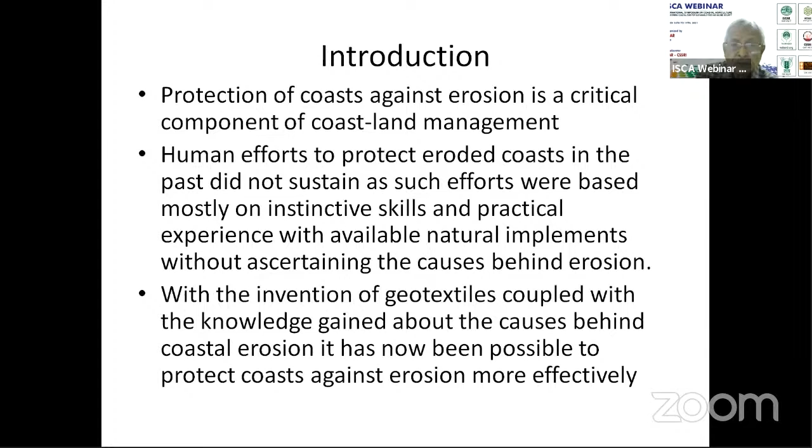The main causes behind coastal erosion are waves driven by wind and storm surges resulting out of tectonic disturbances such as tsunami, and waves caused by big ships veering past the coast. Offshore structures close to shore also cause reorientation of current and wave direction towards coast. Disposition of oceanic currents directed coastward and their celerity, plus littoral - that means along shore - and tidal fluctuation. In fact, oceanic environment is highly dynamic, demanding flexibility in design of coastal protective measures.

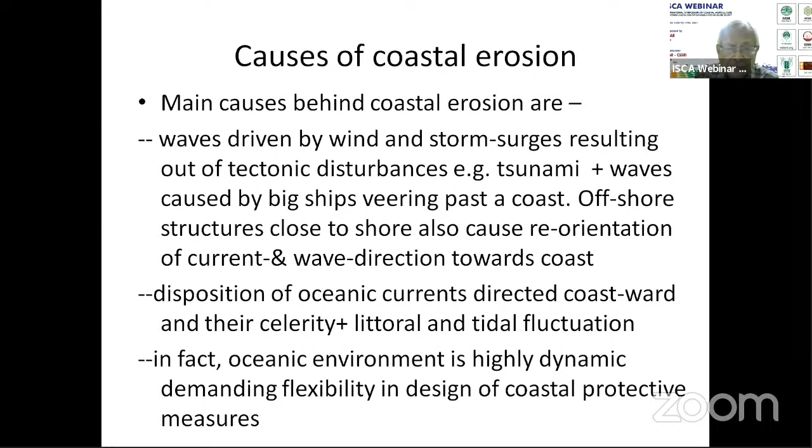Let me explain what is geotextile. Geotextiles are basically breathable planar fabrics made of either man-made fibers or natural fibers such as jute or coir. I will confine my presentation to man-made geotextiles made of thermoplastics such as polyamides, polyester, polyethylene, in view of the fact that natural geotextiles get biodegraded in exposed saline ambience quicker than the desired performance life which the design demands. The other aspect regarding natural geotextile is about porometry, or apparent opening size of the fabric, which coarse natural fibers cannot achieve as precisely as their synthetic counterparts. In fact, porometry is a critical criterion for effective filtration function of any geotextile.

It may be mentioned that geotextiles for coastal protection are used not as fabric only. Various innovative forms of geotextiles have since been developed and produced according to severity of erosion. Usually, geotextiles are applied in or on soil to improve its engineering performance. Engineering performance implies developing adequate capacity of soil to remain stable under impact of different kinds and degrees of imposed forces. Geotextiles basically act as change agents that help build up effective stress.

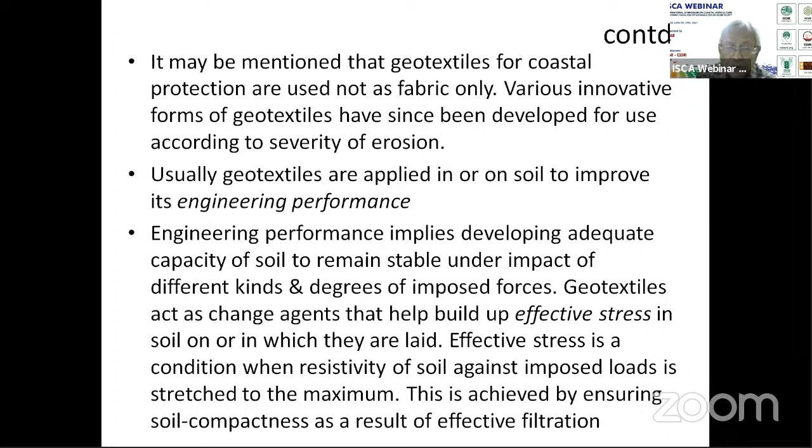Engineering performance implies developing adequate capacity of soil to remain stable under impact of different kinds and degrees of imposed forces. Geotextiles act as change agents that help build up effective stress in soil, on or in which they are laid. Effective stress is a condition when resistivity of soil against imposed loads is stretched to the maximum. This is achieved by ensuring soil compactness as a result of effective filtration.

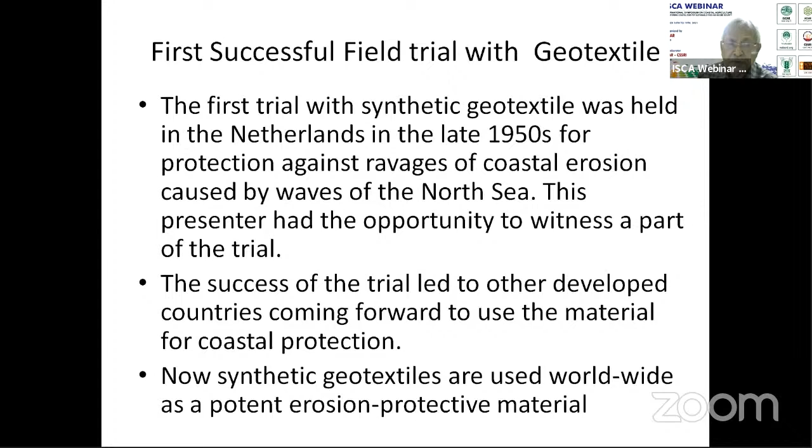The first trial with synthetic geotextiles was held in the Netherlands in the late 1950s for protection against ravages of coastal erosion caused by waves of the North Sea. This presenter himself had the opportunity to witness a part of this trial. The success of the trial led to other developed countries coming forward to use the material for coastal protection. Now, synthetic geotextiles are used worldwide as a potent erosion protective material.

The special features of synthetic geotextiles are long durability, high tensile strength, and adaptability to manufacture customized fabrics in bulk at affordable costs. The main functions of any geotextile are separation, filtration, and reinforcement. Natural geotextiles lag behind their synthetic counterpart in all the above features. The severity of erosive forces in coasts demands uncompromising compliance of these features.

In fact, there are three factors. First factor is durability. Second factor is tensile strength. Third factor is fiber fineness, which will make it possible for any geotextile to conform to the desired apparent opening size.

But in respect of some natural geotextiles, I personally worked in the field of jute geotextiles. I know there are some limitations of natural geotextiles, which is why I'm speaking about synthetic geotextiles, in view of the fact that the erosive forces on the coast, sea coast, are very severe, and we cannot make any compromise in the design of a geotextile.

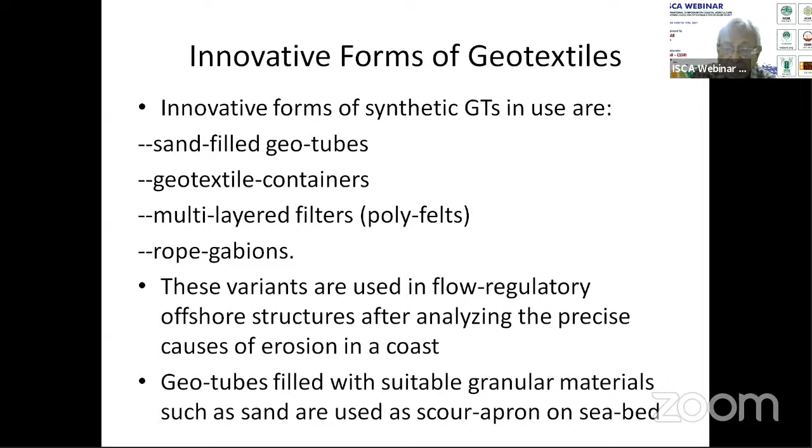After analyzing the precise causes of erosion in the coast, geotubes filled with suitable granular materials such as sand are used as scour apron on the seabed. Geotubes are also used as a component of groins or spurs or dikes. These are offshore structures. Large volume geocontainers are sometimes used as components of offshore structures also.

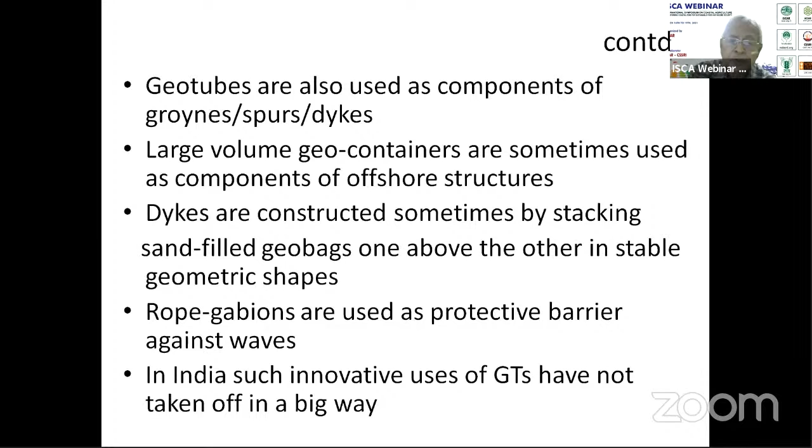Dikes or embankments are constructed sometimes by stacking sand-filled geobags one above the other in stable geometric shapes. Rope gabions are used as protective barriers against waves. In India, such innovative uses of geotextiles have not taken off in a big way.

There are two principal types of geotextile that are used conventionally: woven and non-woven. This is known to all geotechnical people. Woven geotextiles are used for separation, filtration, and reinforcement, while non-woven geotextiles supplement or improve filtration function.

Woven geotextiles possess higher abrasive, puncture, and tearing resistance and tensile strength than their non-woven counterpart. Non-woven geotextiles score over woven types in respect of permeability. In coastal erosion, sometimes both types are used in conjunction in cases where strength and filtration are both called for.

For a geotextile to perform effectively, it needs to satisfy mechanical, hydraulic, and durability criteria at sites. The long-term behavior of a geotextile against mechanical stresses in a site-specific hydraulic environment is pre-estimated in a laboratory. When the fabric is overlain by stone concrete revetment to withstand the initial impact of erosive forces, including uplift caused by seepage flow...

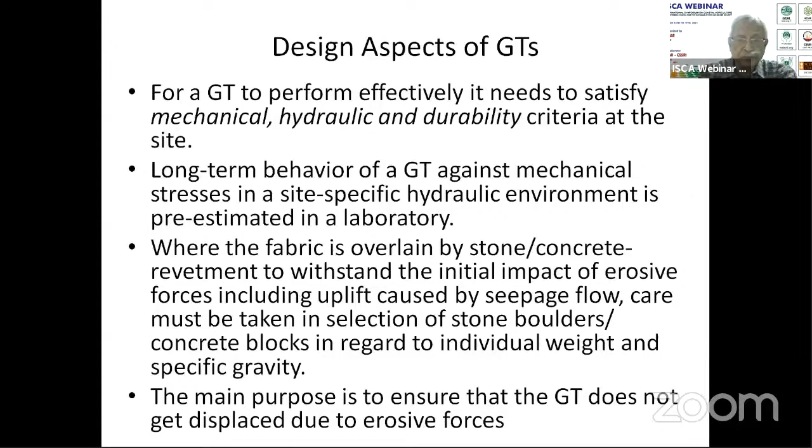Care must be taken in selection of stone boulders and concrete blocks in regard to their individual weight and specific gravity. The main purpose is to ensure that the geotextile doesn't get displaced due to erosive forces. In extremely severe cases, additional structural interventions such as groins, breakwaters, spurs may be needed to ensure repulsion or reorientation of currents and drifts away from the coast.

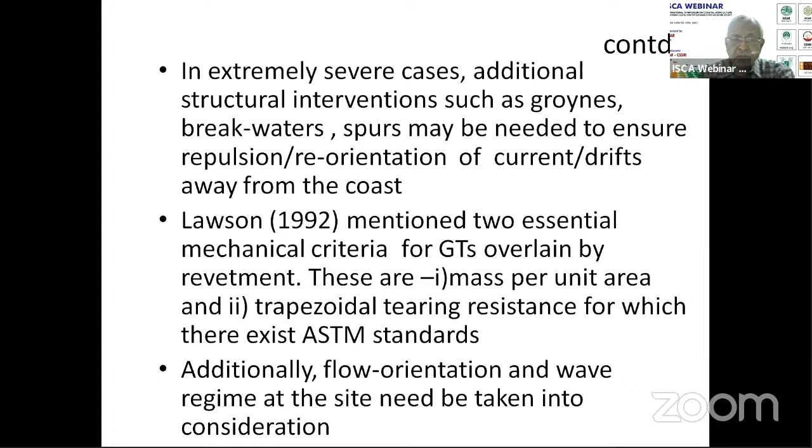Lawson, in a paper in 1992, mentioned two essential mechanical criteria. These are mass per unit area, and number two, trapezoidal tearing resistance, for which there exist ASTM standards. Additionally, flow orientation and wave regime at the site need to be taken into consideration.

The type and nature of coastal soil also requires to be looked into. The nature of coastal soil material will determine the desired along-plane and across-plane drainage capacity of the geotextiles to be selected, which is called transmissivity and permittivity in geotechnical parlance, through prior laboratory tests.

In fact, selection of the right product of geotextile and control of material quality and execution are critical. For coastal protection, it is advisable to adopt a conservative design. There are two aspects: clogging and blocking. The geotextile may get clogged.

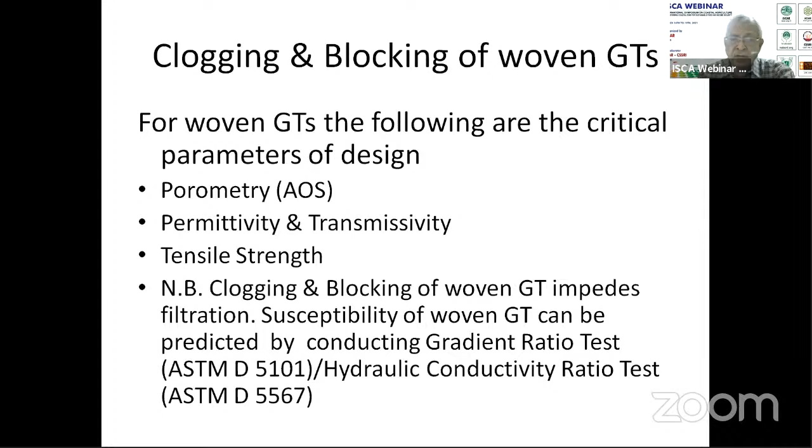Inside the geotextile, there may be deposition of sand or other particles, and blocking is superficial coverage or blockade of the geotextiles. For woven geotextiles, porometry or apparent opening size, permittivity, transmissivity and tensile strength are important. Clogging and blocking susceptibility may be determined prior to application by conducting the gradient ratio test (ASTM D5101) or the hydraulic conductivity ratio test (ASTM D5567).

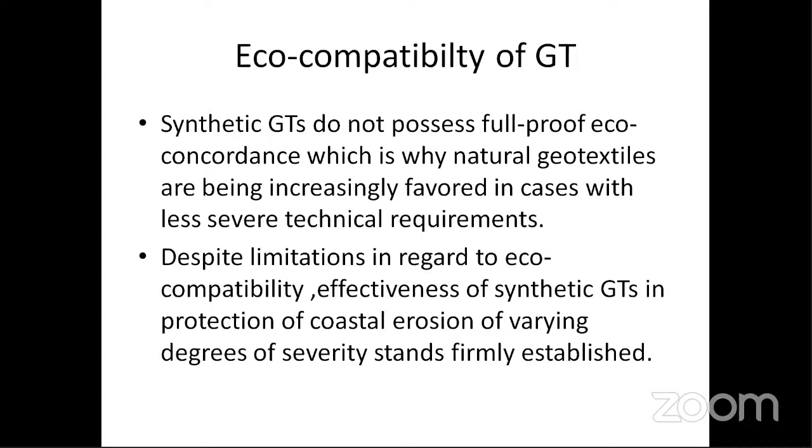Synthetic geotextiles do not possess foolproof eco-compatibility. That is a major disadvantage, which is why natural geotextiles are increasingly favored in cases of less severe technical requirements. Despite limitations in eco-compatibility, the effectiveness of synthetic geotextiles in protecting against coastal erosion of varying degrees of severity firmly stands established.

My suggestion is that we must explore if mangroves on the coast can be nurtured concurrently with synthetic geotextiles to protect coastland against erosion. Mangroves with stilt roots can hold the coastal soil and at the same time induce accretion of silt over the coast when silt-laden seawater passes through their root system, besides attenuating wave impact. There are about 64 varieties of mangroves with varying degrees of salt tolerance and growth rates. It is advisable to consult experts to decide on the right mangrove species for a particular site, depending on salinity and soil type. Perforations may be made in the geotextile to plant mangroves in them.

This is just a suggestion and demands in-situ trial. In fact, when I was in Port Trust, I was instrumental in setting up a mangrove interpretation center in Nayachar Island, opposite Haldia Docks. But the full research could not be completed before I was transferred.

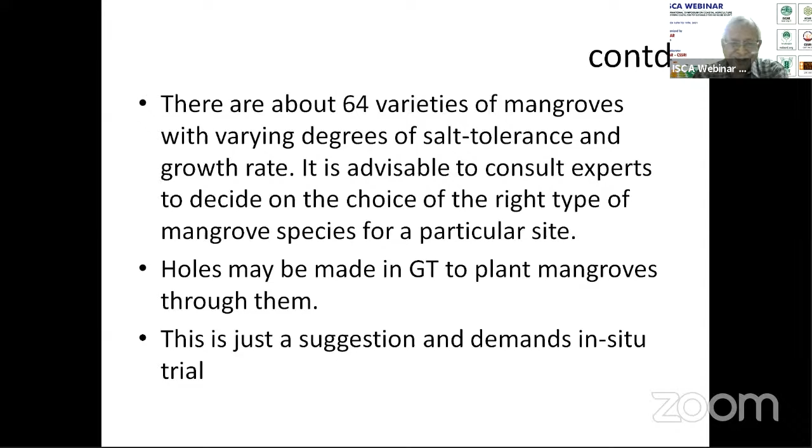Thanks for your attention. This is all what I want to say.

But I must say that the natural geotextiles, as Dr. Gautam Bose mentioned in his subject, that is a structured geotextile with composites of synthetic and natural blend. Whether this can be effective for coastal erosion of moderate severity can also be looked into seriously. I worked with jute geotextiles, and I am very much supportive of jute, but for coastal erosion, I'm apprehensive.

So that's my concluding remarks. I thank you all, Mr. Chairman, especially for conducting this seminar. Thank you very much.

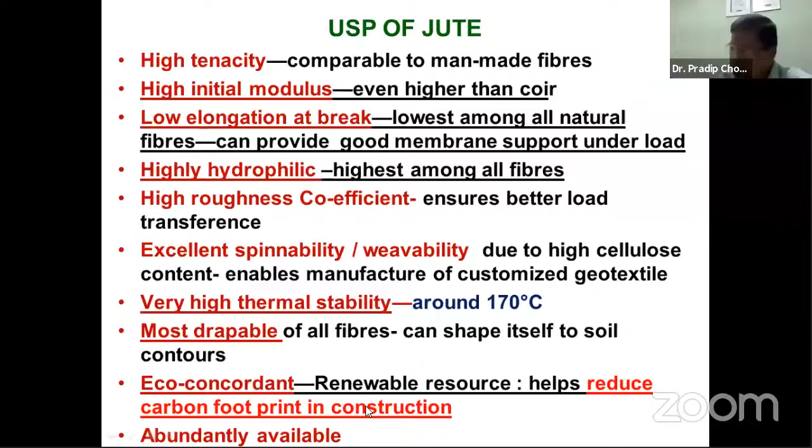There's a very strong high tenacity, high initial modulus. This is a very, very important factor, at low elongation at break. There is a hydrophilic property, a unique hydrophilic property - it can absorb 5 times dry weight in moisture. And also eco-concordance, renewable resource, helps reduce carbon footprint in construction work, and also the advantage is it's abundantly available.

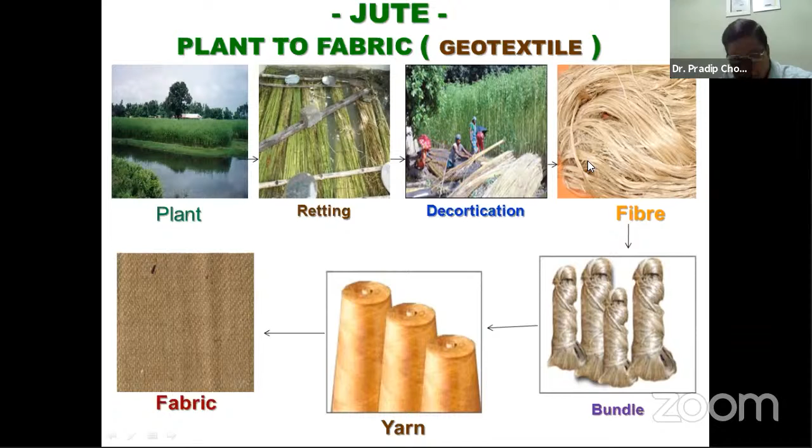My dear friends who have not seen the jute plant and the process, have a look here. This jute plant is retted, fiber is extracted. Thereafter, through mechanical processes, this type of fabric is manufactured using existing machinery in the jute industry. There are several types of jute geotextile - woven, non-woven, open structure fabric, and jute sapling bag - which have been developed and applied successfully all over the world.

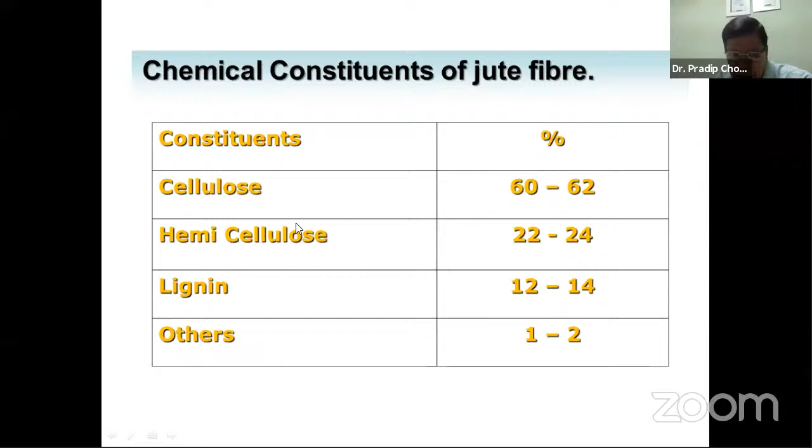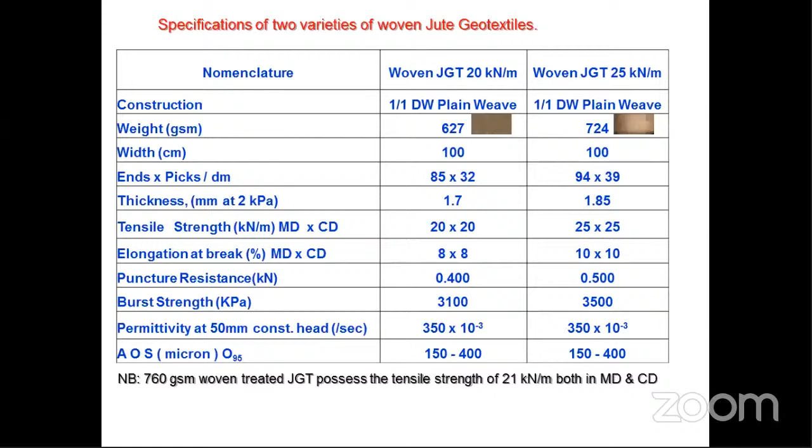These are the technical specifications of different types of jute geotextile. This is for riverbank erosion control as filter fabric - a 724 GSM fabric that has been developed by us, with tensile strength of 25 kilonewton in both machine direction and cross direction. Whereas in riverbank protection as filter fabric, it is 20 kilonewton, having a porometric range between 150 to 400, which matches with most of the particle sizes of soil. The 760 GSM woven jute geotextile, also developed by us, has 21 kilonewton tensile strength and has been used successfully all over the country.

And thereafter, the open structure fabric, open weave as it is called. These are the three main varieties of JGT developed by us and standardized, and included in the schedule of rates of RDSO, BRO, and also the Indian Railways. This fabric is the jute sapling bag fabric - BIS standard has been established, the IS standard is there. It is 272 GSM having these technical features.

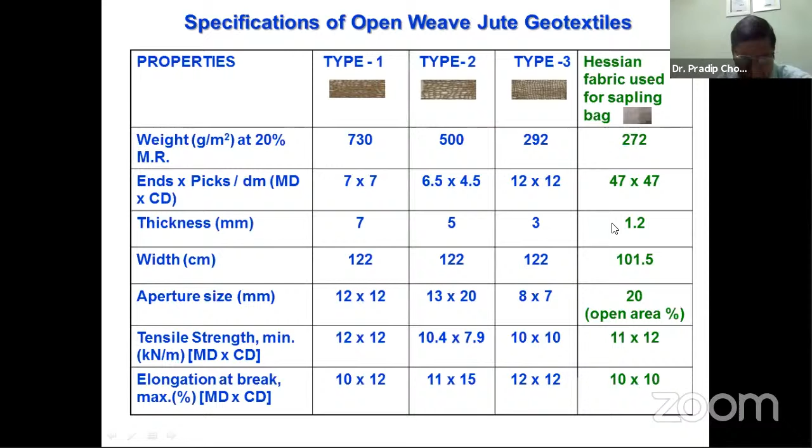Now all of you listening or seeing these slides will be very happy to note that jute geotextile products have been standardized by BIS - all 5 standards have already been standardized by BIS. Research, Design and Standards Organisation of Indian Railways has also prepared this guideline. A Unified Standard Schedule of Rates has also been published by Indian Railways in 2011, which helps all 17 divisions of Indian Railways, excepting Metro Railways, who are using jute geotextile on a huge, large scale.

Indian Road Congress, the most powerful body, which road engineers follow as guideline - after standardization and publication of all these standards, there is now a standard guideline for the design and construction of low volume rural roads using jute geotextile, IRC SP 126 2019. That is the latest achievement. We worked hard and the success came that IRC has accepted and published the IRC code, which you may call the Bible of road engineers for using jute geotextile in construction of rural roads.

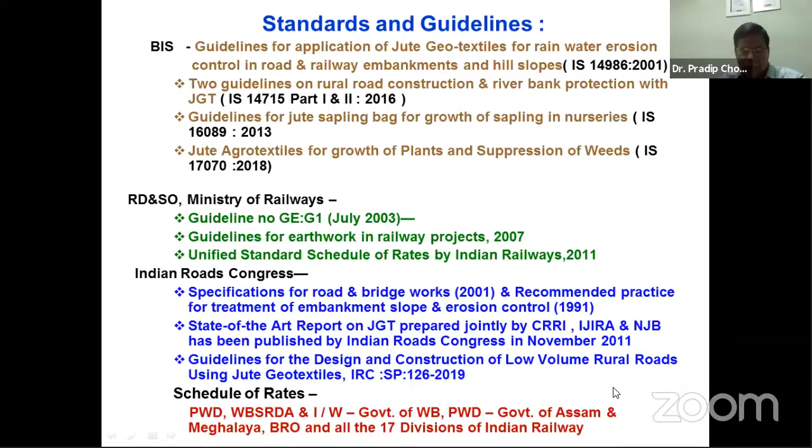And schedule of rates - PWD, WBSRDA, irrigation, PWD of Assam and Meghalaya, BRO, and all other 17 divisions of Indian Railways - they have included and we have standardized it in their schedule of rates.

Jute geotextile is a biodegradable material, known to all including the speaker, that after some point of time it will degrade and mix with the soil. But why are we working with jute geotextile?

Sanmal Sahab has rightly said that jute cannot go everywhere, but in many cases jute geotextile is very effective. Findings of renowned engineer scientists worldwide show that percentage elongation at break of JGT is significantly lower than synthetic geotextile, which is more than 50%, whereas in jute it is around 15% maximum.

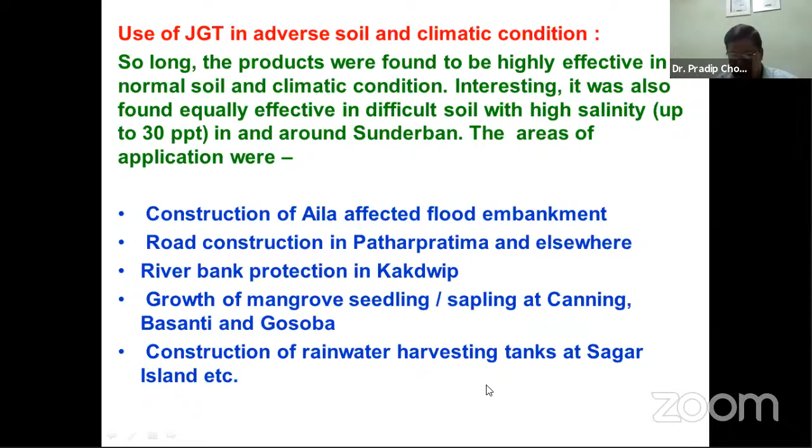Now I would like to show you some case studies. How should I believe? Saying good words is not enough - show the results, then one can believe it. The reconstruction of the Aila-affected flood embankment is one such case.

Name of the work: reconstruction of about 980 kilometers of flood embankment in Sundarban and adjoining areas in North and South 24 Parganas of West Bengal, damaged by severe cyclone Aila in 2009, under the Sundarban Embankment Reconstruction Project by the Irrigation and Waterways Department, Government of West Bengal.

Total 98 sites at Jaynagar, Kakdwip, Gosaba, Basanti, Sonakhali, etc., of South and North 24 Parganas district. The objective was reconstruction of 6-meter high earthen embankment with the use of 500 GSM open weave jute geotextile, followed by grass turfing for stabilization of the slopes of the earthen embankment, to protect the land, houses, population, etc., and to arrest inflow of saline water to the mainland of the area.

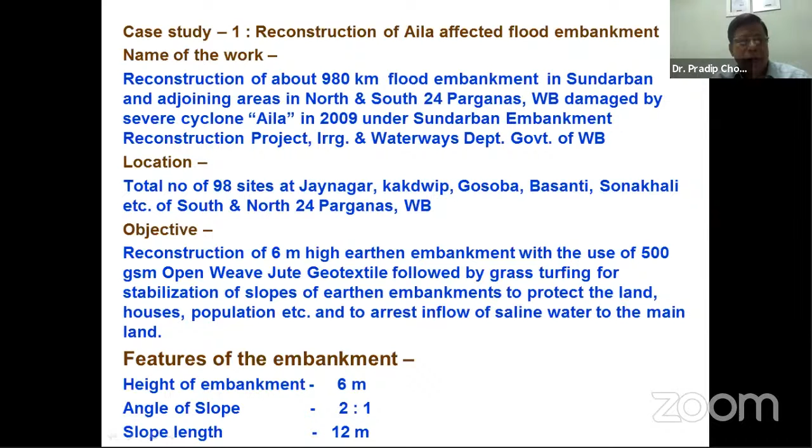Features of the embankment: height was 6 meters, angle of slope was very gentle at 2:1 depending on the angle of internal friction, and slope length was an inclined length of about 12 meters.

This is the simple method of laying jute geotextile on the prepared slope. It is available in the form of roll or bale, whatever it may be. It is rolled down the slope and anchored onto the ground with the help of nails and other means.

The surface of the slope was first dressed and leveled. JGT was laid side by side on the surface with an overlap of 10 centimeters and fixed onto the ground with bamboo pegs or iron nails, whatever was available. Top and bottom ends were anchored in trenches dug at the top and bottom lines so it would not be dislodged due to rain, and grass sods and seeds were spread, followed by occasional watering.

Result and discussion.

At the end of 6 months of application of jute geotextile, the slopes of the embankment were found to be sufficiently stable and the entire surface was covered with vegetation. A similar process was adopted to restore the entire flood embankment in phases.

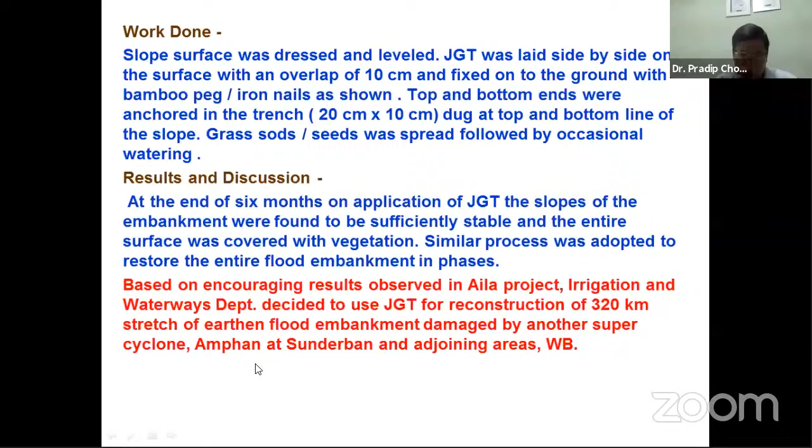Based on the encouraging results in the Aila project, the Irrigation and Waterways Department decided to use jute geotextile for reconstruction of a 320-kilometer stretch of flood embankment damaged by another super cyclone, Amphan, at Sundarban and adjoining areas. They will take our support and do that.

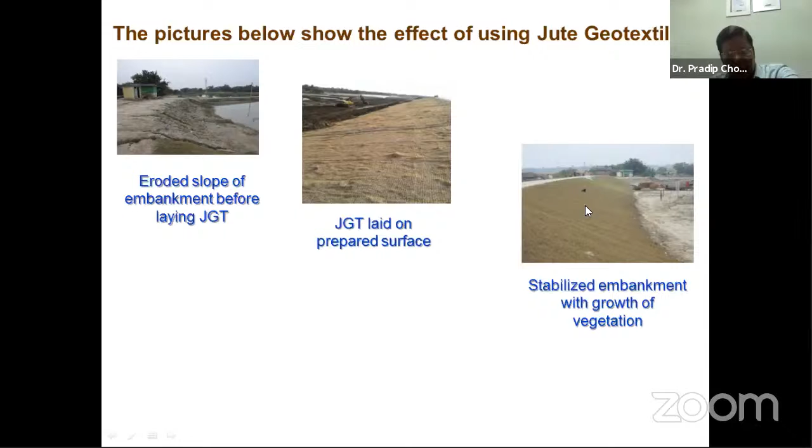This is a pictorial view of the Aila embankment. The eroded slope is vulnerable to erosion. Jute geotextile was laid on the ground, on the slope, and anchored properly. After 3, 4, 5 months, the entire area was covered with vegetation. That is the most interesting thing.

Granular subbase layer 1 and 2, 100 millimeter each, was applied, also laid prior to applying the water-bound macadam layer. As of day before yesterday, this layer was done, and within 1 week it will be finished with 20 millimeter thick premix carpeting, followed by a 6 millimeter thick bituminous seal coat as a wearing coat, that is the riding surface.

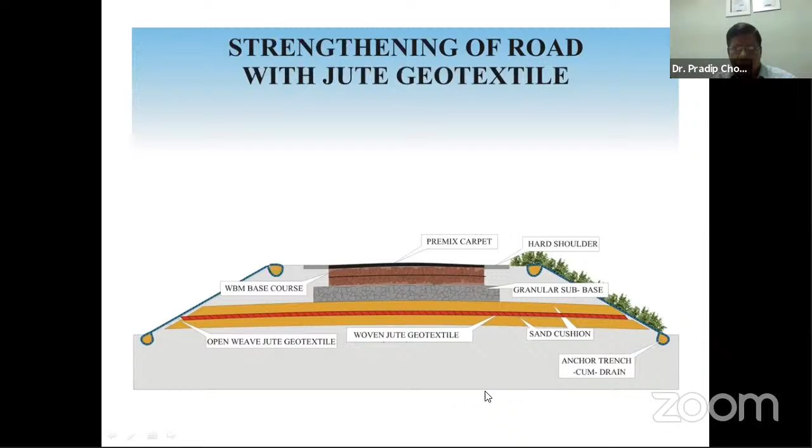This is the method of applying jute geotextile between the subgrade and subbase. This is the subgrade, this is the subbase, and the fabric ensures it doesn't penetrate or intermix with the construction material.

Observation: a post-work study was conducted by engineers of the West Bengal State Rural Development Agency when no distress of the treated road, up to the WBM layer, was noticed. The top surface was perfectly smooth. Excavation is scheduled near the edge of the pavement to collect soil samples for the subgrade below the JGT layer, for testing at the laboratory.

Conclusion: the average CBR value of the subgrade before application of JGT was 3.3%. The subgrade is supposed to gain strength significantly, as found in more than 200 cases in India by application of jute geotextile. Lot of work has been done in Bangladesh and India, where we found that on application of jute geotextile, the CBR value in practical field conditions enhances by around 3 times.

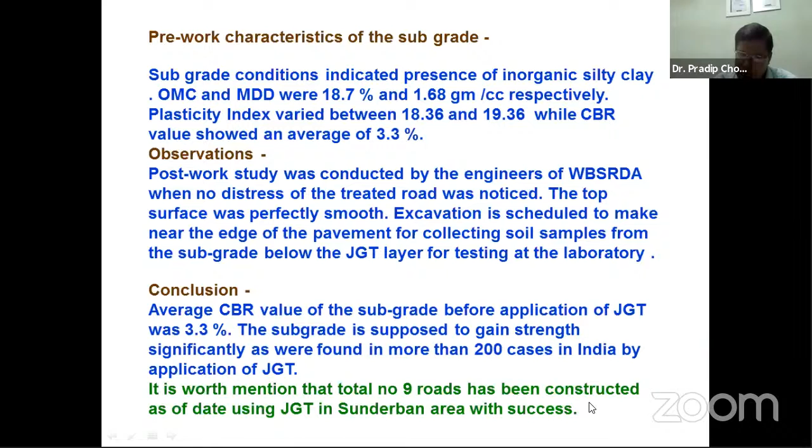A total of 9 roads have been constructed in the remote areas of Sunderban with success. This is the precondition of the road. Bricks were removed, sand was placed, the subgrade was compacted, and then jute geotextile was laid all along. Thereafter, GSB material was laid, and WBM layer was laid on top.

Next, river bank protection work was also done in Sunderban area: restoration of the severely eroded right bank of the river Jagatdal at village Uttarsurendraganj under Pathar Pratima block, using treated jute geotextile under Kakdwip irrigation division. The objective was to control erosion of this severely eroded bank using treated JGT.

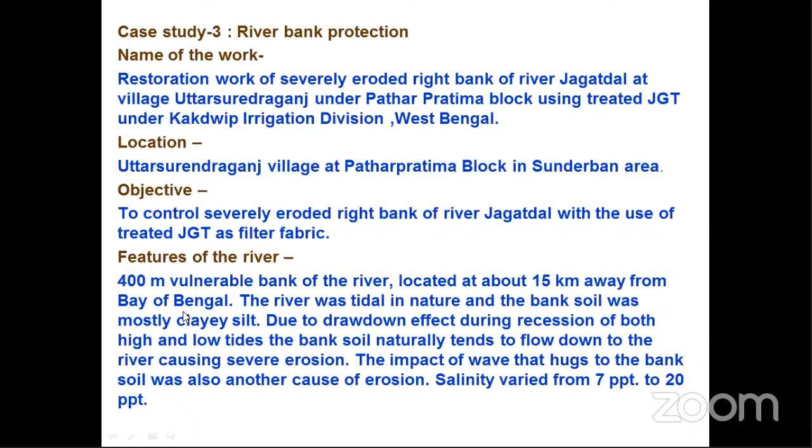Features of the site: a 400-meter vulnerable bank of the river located around 15 kilometers away from the Bay of Bengal. The river was tidal in nature and the bank soil was mostly clayey silt. Due to the drawdown effect during recession of both high and low tides, the bank soil naturally tends to flow down the slope into the river, causing severe erosion. The impact of waves hitting the bank soil was another cause of erosion.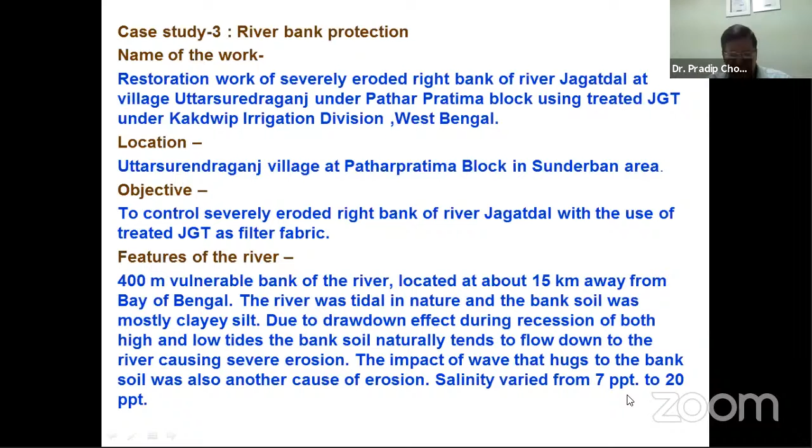Salinity varied between 7 ppt to 20 ppt at the site.

Protective measures taken with JGT: treated JGT was laid as filter fabric on the prepared bank slope to prevent migration of soil particles from the bank, and also to provide escape routes for confined water to neutralize differential overpressure. JGT was then covered with brick block as armor.

Results: no sign of erosion was noticed even after an elapse of 2 years. Pradeep Datta, assistant engineer, spoke to me about 1 to 1.5 years back and told me the entire area was in excellent condition, with no sign of erosion observed.

Average siltation over this period was estimated at around 20 centimeters over the armor. Most of the treated area was covered with vegetation, ensuring stabilization of the river bank with the use of JGT. The undisturbed bank after 2 years implies that jute geotextile performed its designated functions and helped in natural consolidation of the bank soil.

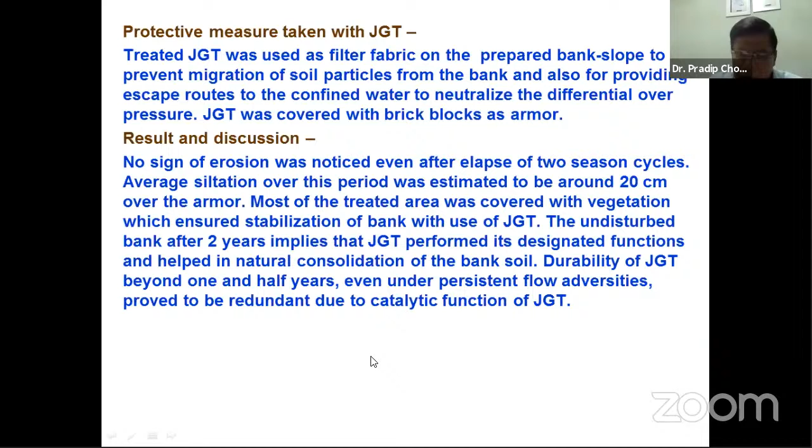Durability of jute geotextile beyond 1.5 years, even under persistent flow adversity such as tidal two-way flow, proved its effectiveness due to the catalytic function of JGT.

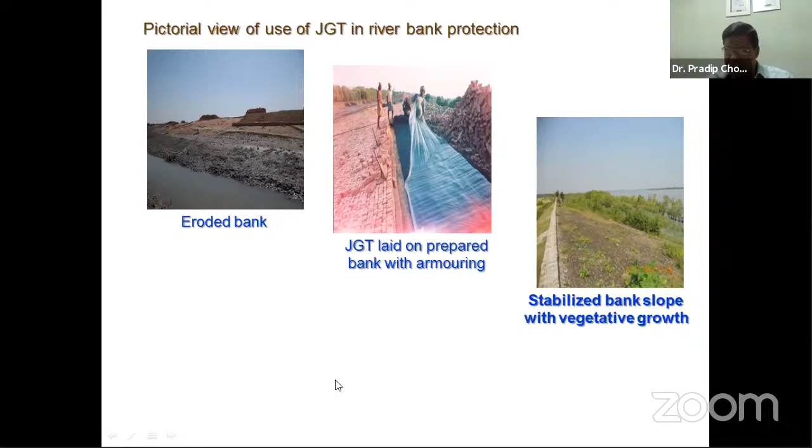So biodegradability of jute geotextile is never a technical deterrent, as shown in most of the studies.

Next, use of rainwater harvesting tank - a unique project the government has undertaken all over the state and country. They are doing slope protection of roads and growth of saplings. This work - slope stabilization of the rainwater harvesting tank, slope stabilization of the road embankment, and growth of saplings using jute sapling bags - was done in

Ganga Sagar, Bakkhali Development Authority at Sagar Island. Rainwater harvesting tank at Benuban, road from Chemaguri jetty to Benuban, and jute sapling bags within the premises of GBDA, was done by Ganga Sagar Bakkhali Development Authority.

The objective was to stabilize the outer slopes of the rainwater harvesting tank to arrest inflow of saline water into the specially designed tank for storing rainwater meant for fishery and public utility. Second, to stabilize the vulnerable slopes of the road. And finally, the growth of saplings using jute sapling bags.

Nature of soil is predominantly saline, with texture mostly clayey and saline, which hinders growth of normal vegetation and pisciculture.

Features: the dimension of the tank is 200 meters length, 27 meters breadth, and depth of 2 meters. I'm showing this because there is every possibility of eroding the bank, so erosion could be checked with the use of this treatment.

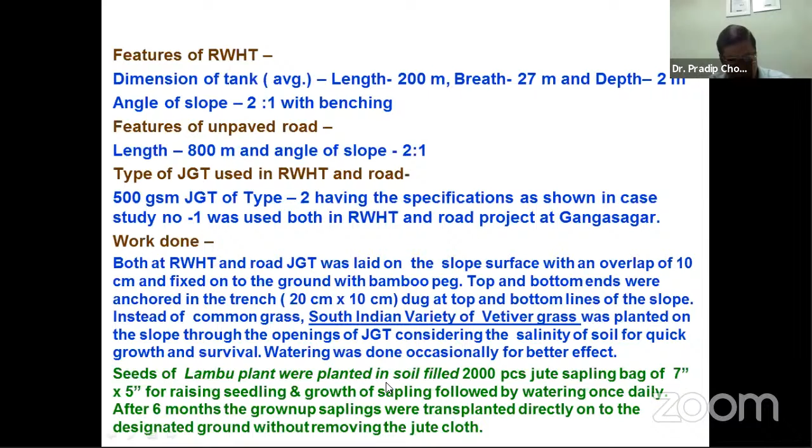Watering was done occasionally. Seeds of Lambu, locally called shegun in Bengali - I cannot remember the botanical name - were planted in soil filled within 2,000 pieces of jute sapling bags of this dimension, for raising seedlings and growth of saplings, watered once daily. After 6 months, the grown-up saplings were transplanted directly onto the designated ground without removing the jute cloth - that is the advantage.

Within a period of 4 months' time of application of JGT, the slopes of the embankment were found to be sufficiently stable, and the entire surface was covered with vegetation at both sites. That is the rainwater harvesting tank and road slopes.

The performance of the jute sapling bag was also found quite satisfactory in respect of growth and survival rate of the seedling and sapling. The most interesting part: the grown-up saplings were transplanted directly onto the ground without removing the biodegradable jute bag, after a period of about 6 months, unlike polybag.

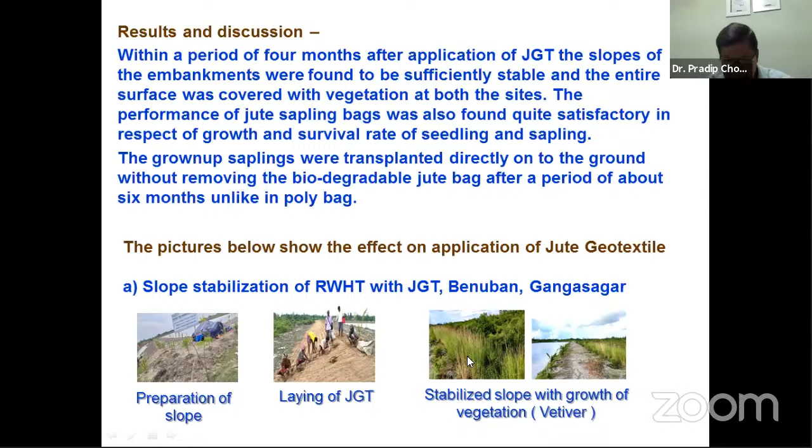Here you can see the picture of how this was done in the road slope, showing the vegetation growth of vetiver grass, length and root, everything you can have a look. Here also, the rainwater harvesting tank slope was protected and treated with jute geotextile, and you can see the growth of all these things.

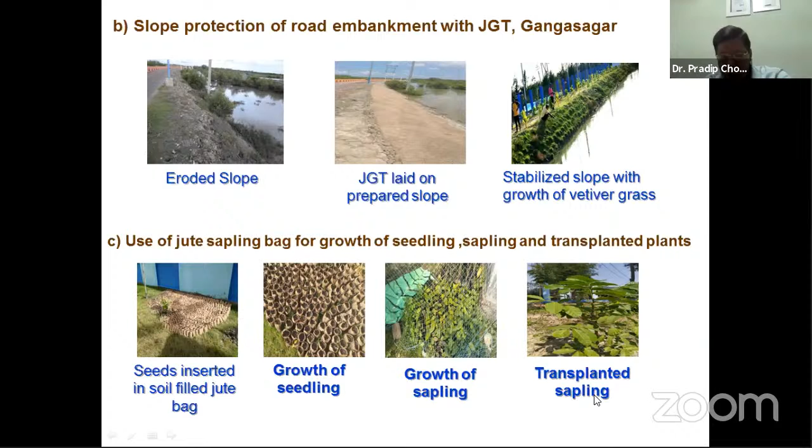Here you see that Ganga Sagar Bakkhali Development Authority used the jute sapling bag: seeds inserted in the soil filled bag, growth of seedling first, thereafter emergence of sapling started, then it was transplanted onto the ground. Next slide. Last case study is the sapling bag for mangrove plantation.

Location was different: Canning, Basanti, Gosaba in Sundarban area. The objective was to use eco-friendly biodegradable jute sapling bag for better growth and survival rate of mangrove saplings, discarding the use of environment pollutant polybag, to maintain eco-ambience in the area.

Features of the jute sapling bag: standard Hessian fabric as per BIS standard was used and cut and stitched in a lock stitch sewing machine, industrial model, to make the bag. Out of a total 13 lakh bags supplied by Jute Corporation of India, 5 lakh were prepared with gray fabric having dimension of 9 inches by 6 inches, while the remaining 8 lakh with size 5 inches by 7 inches.

Work done: seeds of mangrove were sown in the bag, filled with soil, and allowed to grow as seedlings and also as saplings. After about 3 to 4 months' time, the grown-up saplings were transplanted to the designated ground along the coastal side.

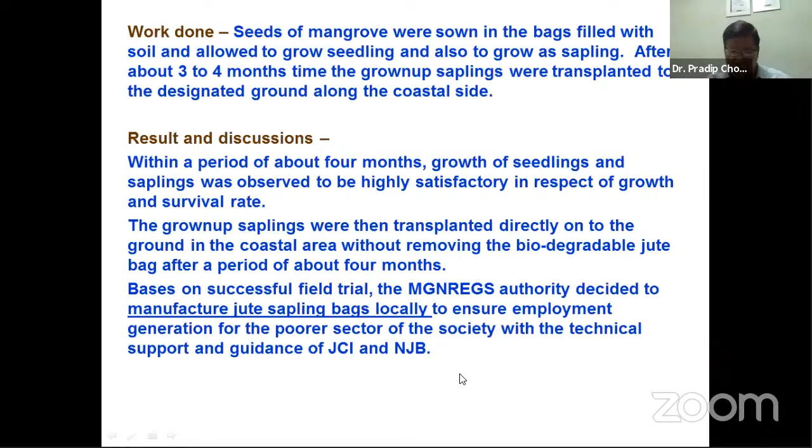Based on successful field trials, the MGNREGS authority decided to manufacture jute sapling bags locally to ensure employment generation for the poorer section of local society, with the technical support and guidance of Jute Corporation of India and National Jute Board. My dear friends, this pictorial view you will definitely enjoy.

The poor women are inserting these seeds inside the sapling bag, placing them for growth; seedling growth started, then sapling growth, then transplanting this sapling on the proper designated site, and finally this is the result it speaks for.

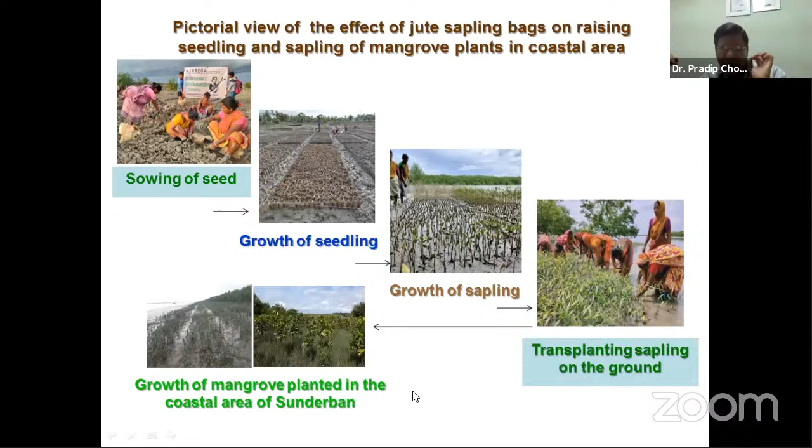Chakraborty Sahib, our JC Sahib and chairman of the session, mentioned that he has seen this, and Shanal Sahib was also mentioning about this. This is the thing done using these biodegradable jute bags. Biodegradable is a blessing, not a curse. Thank you very much, thank you for your patience here.

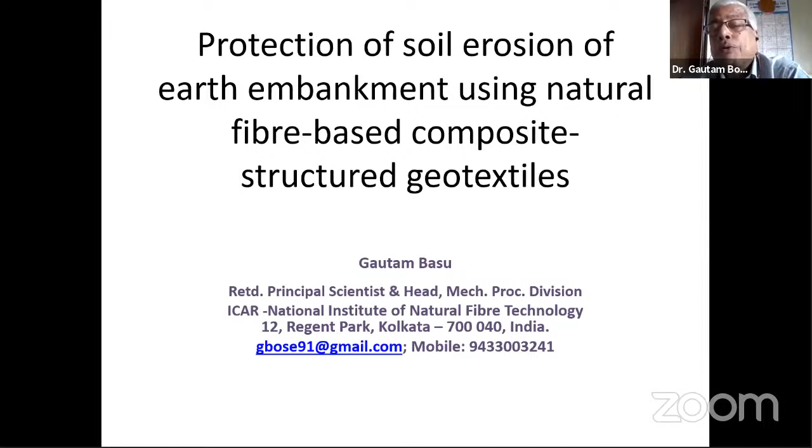So we have structured, manufactured, and designed a geotextile which can be suitable for both types of land structures and land types. Mostly it is already built. The genesis of this work is the bioengineering of the soil structure using geosynthetics, one of the major methods.

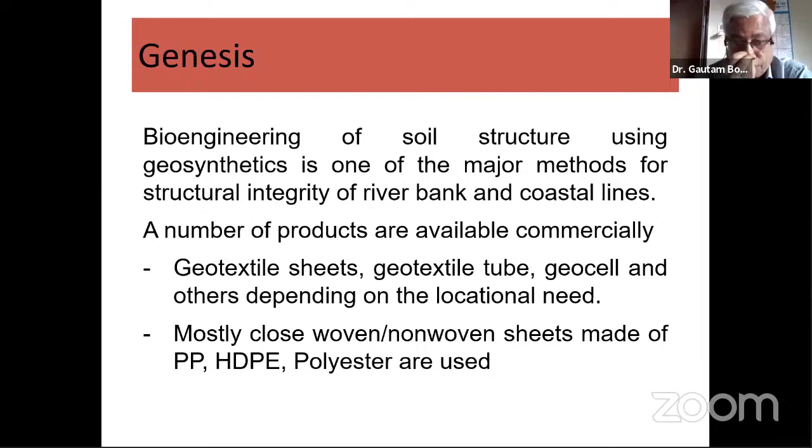Mainly the products used are PP, HDPE, polyester, as already mentioned. All this material's specification is basically highly location specific. The advantages of synthetic geotextiles have already been discussed, so I am not elaborating on these things again - high durability, lightweight, and high strength.

But there are some problems with synthetic geotextiles. The major problem is low modulus - it's a very low modulus material, which sometimes poses problems in structural engineering or in the case of geotextiles. Another problem, which nobody has highlighted, is the slippery nature. So placing or laying this material on the earthen structure is really sometimes a problem, especially for soil erosion protection, and it creates phase separation.

The synthetic creates phase separation between two soil layers. So plantation, flora and fauna can be destroyed because the structure of the geotextile is supposed to be 100% covered - though it's not 100% actually, but it's supposed to be. The flora and fauna are destroyed and vegetative growth is not possible in this way.

Another thing is the polyolefin, which is lighter than water. We know the density of polyolefins is about 0.9 to 0.95, less than water. So it tries to float above the water. In water-prone areas where I have to lay the fabric, this was the problem.

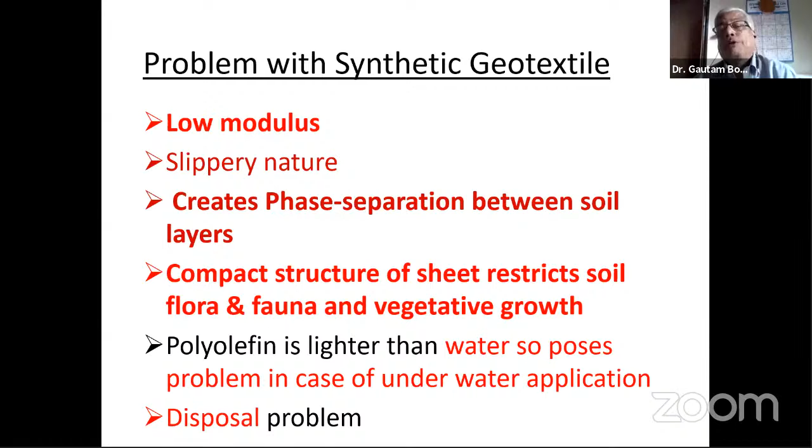Now, what I tried for this - I looked at the problem of synthetic geosynthetics, 100% geosynthetics, and being a jute scientist at an Institute of Natural Fiber, I have the expertise on natural fiber. So I found some positive points of 100% natural fiber geotextiles, which have been assimilated into a single product. So how could we resolve this problem?

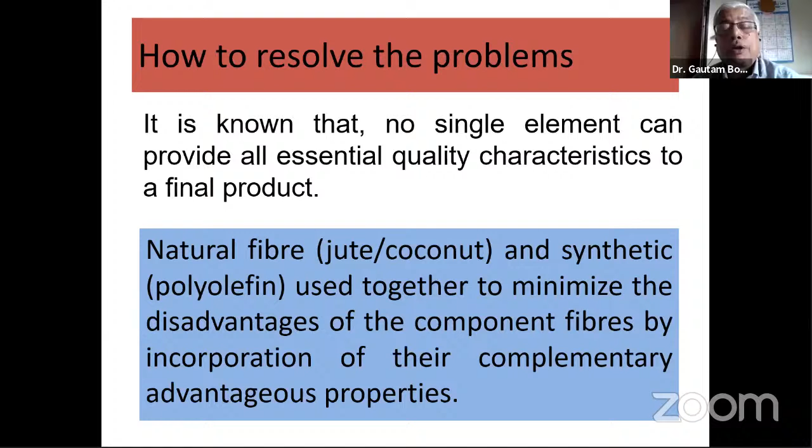It is known that no single element can provide all essential quality characteristics of the final product - this is known to everyone. No single element, either 100% synthetic or 100% jute, can do it alone. For 100% jute, a lot of problems are there, already discussed, and about synthetic, I already discussed in the previous slide. So in our work, natural fiber - jute, coconut - and synthetic have been used together to minimize the disadvantages of each component fiber while incorporating their complementary advantages.

Let us see briefly the advantages I have emphasized. There are many advantages, mainly the tensile modulus and the greatest dimensional stability of the jute fabric, which is lacking in synthetics. Lignin helps to strengthen or stabilize soil structure, and jute contains more than 15-20% lignin, so that remnant lignin strengthens the soil structure.

The main problem is early biodegradability, but being a jute technologist, I have taken this early biodegradability as an advantageous feature for the present structured geotextiles. It is not a problem; I've used this as an advantage in the new product.

Another fiber I have also used is coconut fiber. This coconut fiber has high durability, very very high durability, and very high lignin content also.

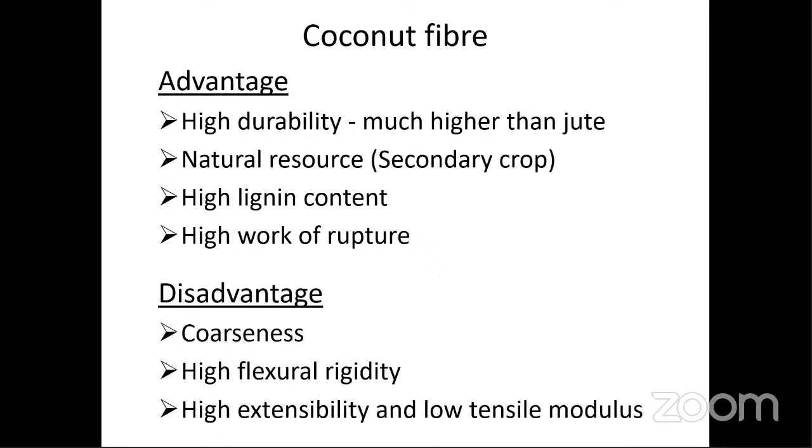Please check, please check.

Is my presentation visible now? There is some problem with the connections. Is my presentation visible? No, sir, please share your screen. I have to share it again.

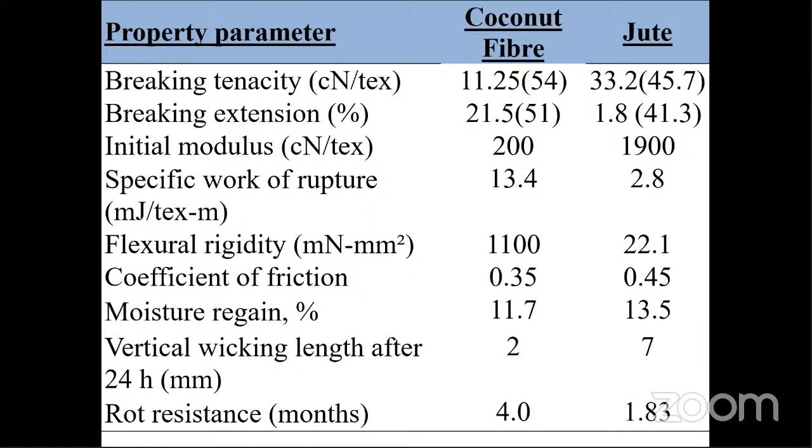Okay, mute. Is it now? Yes, sir, is it? It is not. Okay, sorry for the interruption.

I'm quickly going through the parameters of the material and the product—its construction, the plain weave, which is basically a union fabric. In the warp is PP and HDPE flat tape, 2.5 millimeter, available everywhere in India, used in the warp direction. Its linear density used was 1111 to 2000 tex depending upon location, to make location-specific products. I have used this fabric in two places in Bengal.

In one place it was 1111 tex HDPE, and the other was 2000 tex polypropylene, with jute quality ratio only 75 to 80. Linear density of the jute is 900 tex, mesh density 39 and 46, and pick insertion rate is 420 per minute. So we are making a jute fabric with jute content of 80 to 85% at such a high pick insertion rate—that is the beauty of this product.

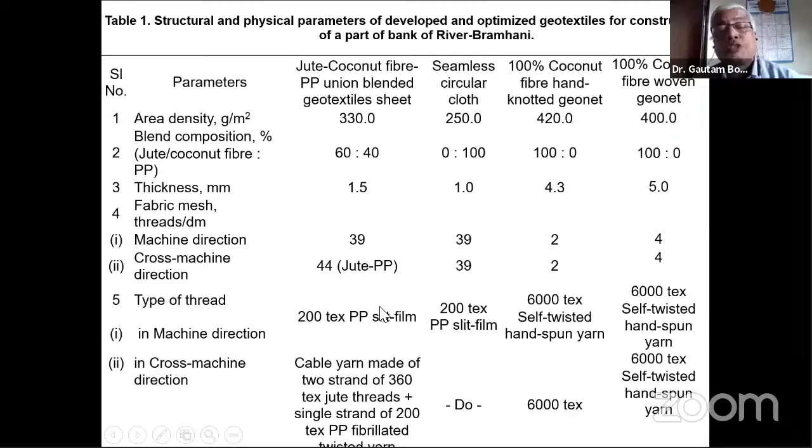Jute and coconut fiber and PP was initially in a 60 to 40 ratio. Thickness is 1.5, and other specifications I already discussed. You can see the blend ratio is 86 to 14 in the 10 kilonewton cloth, and 83 to 17 in the 20 kilonewton cloth—17 being the synthetic part and 83 the jute part. So in total GSM, 83% is jute and only 17% is synthetic.

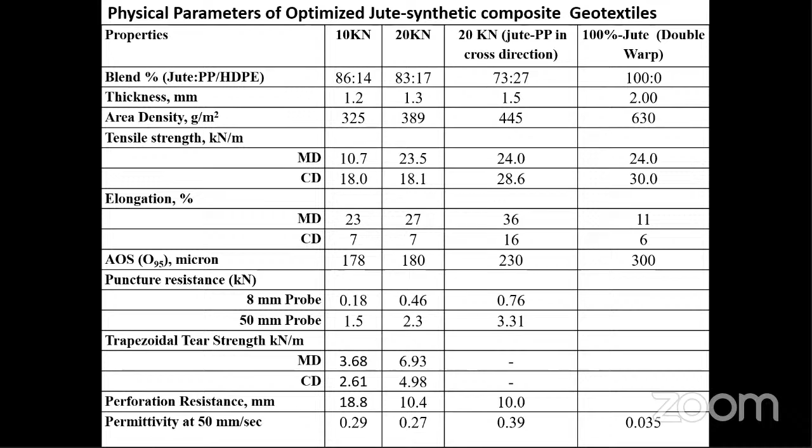A 20 kilonewton cloth could be made, and the apparent opening size was 178 to 180, well within the ASTM US standard of 178. Puncture resistance and trapezoidal tear resistance, as mentioned by Mr. Sanal, were also well above the ASTM standard.

Another beauty of this product is shown in the load elongation curve: the dotted line for the synthetic part shows low modulus, while jute has a high modulus. After blending, we get a very high work of rupture—synthetic has high strength and high elongation, giving ultimately a high work of rupture, but after blending the work of bursting strength is much higher than with synthetic alone. This is another beauty of this new product, shown with the dotted line for 100% synthetic compared to the blended material.

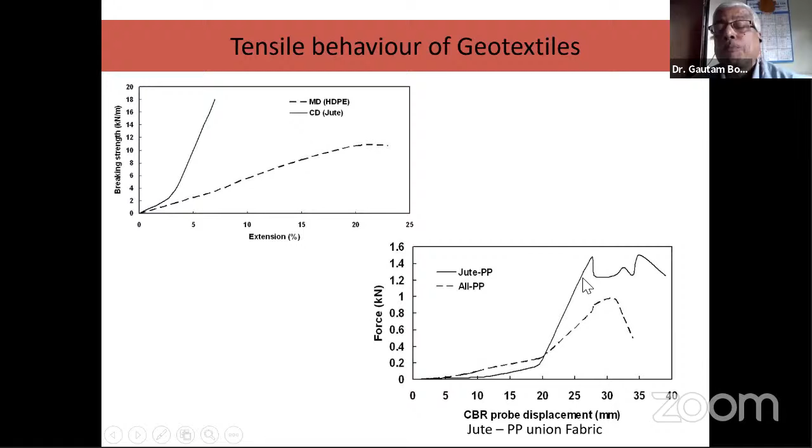I'm quickly going over the case study. I've taken two case studies: one where river water is not always touching the embankment, and another where water is always embracing the river bank. This is in Bengal, in the district of Birbhum.

This is a sectional diagram of the geotextiles, so all geotextile technologists can understand it easily. It's the embankment, dressed as per the specification mentioned by Dr. Pradeep Chaudhary. It was well dressed, and then geotextiles were laid this way, then grass sods covered the geotextile, as you can see in the work.

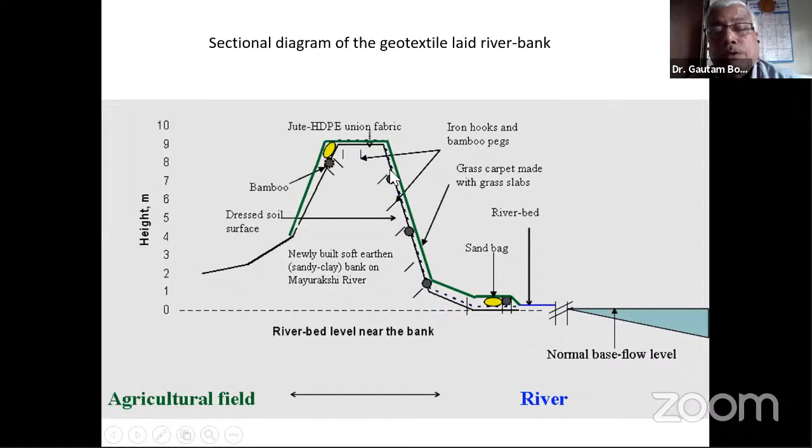Simple things like locally available bamboo and other locally available materials were used to anchor the cloth, and the geotextiles were covered with grass sods.

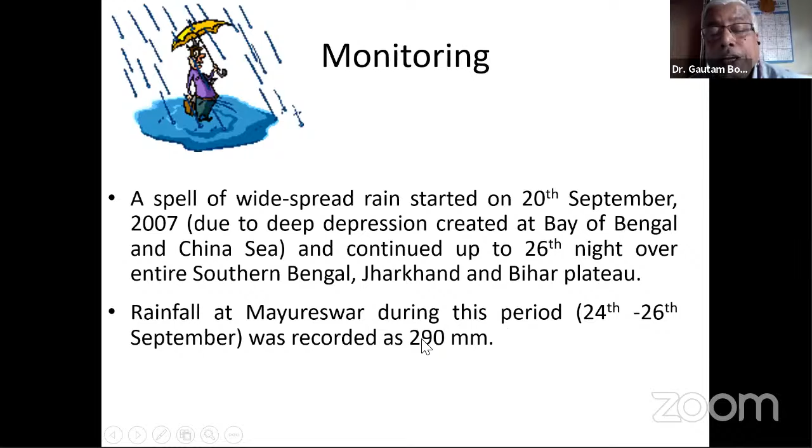You can see that after 3 months, the work that started on 6th June 2007 looked like this. After 4 months, by September, there was huge rain—if you remember 2007, about 290 millimeters within 5 days.

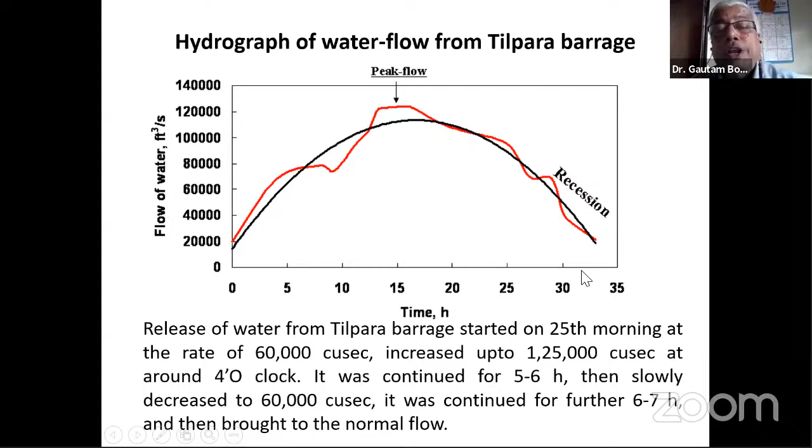Water was released from the Tilpara Barrage and Massanjore Dam, and subsequently from Tilpara Barrage, total water flow was 165,000 cusec. At this rate, water reached up to this length, with only 1.5 meters left at that time.

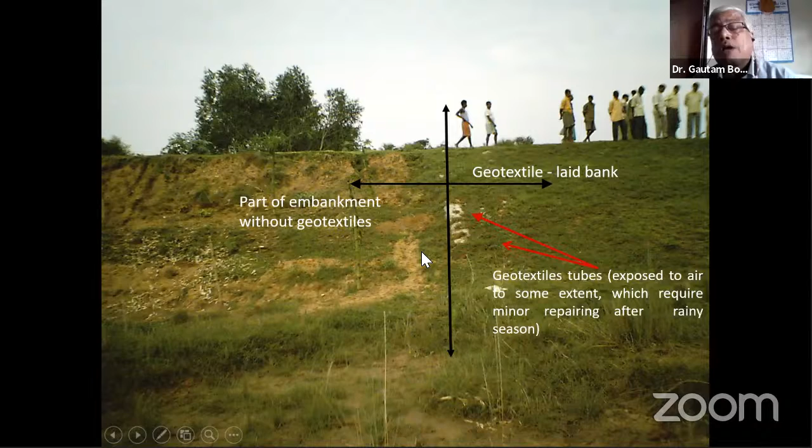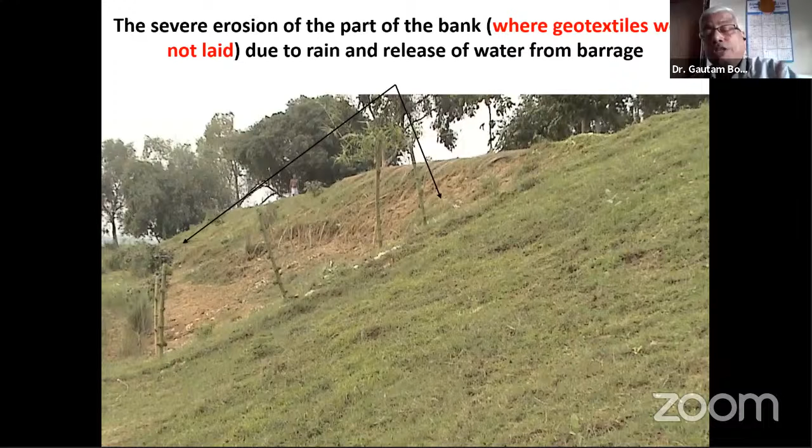You can see the extent of erosion in the bare, untreated slope, compared to the protection of the bank with geotextiles. The data showed that the geotextile-treated bank had no rain cuts within 100 meters, whereas the untreated section had 64 rain cuts. Other parameters: about 700 centimeters depth, and width was also 700.

And after 1 year, sir, this is how it looked.

Our concept—if you ask how jute and synthetic showed such success—is that in the initial 2 to 3 months, as rain continues, fine soil particles get deposited behind the geotextile, where jute and synthetic have been made with an apparent opening size of 180. As days go on, after 3 or 6 months, the jute part gets mixed with the soil—it rots, mixes with the soil, and the opening size increases.

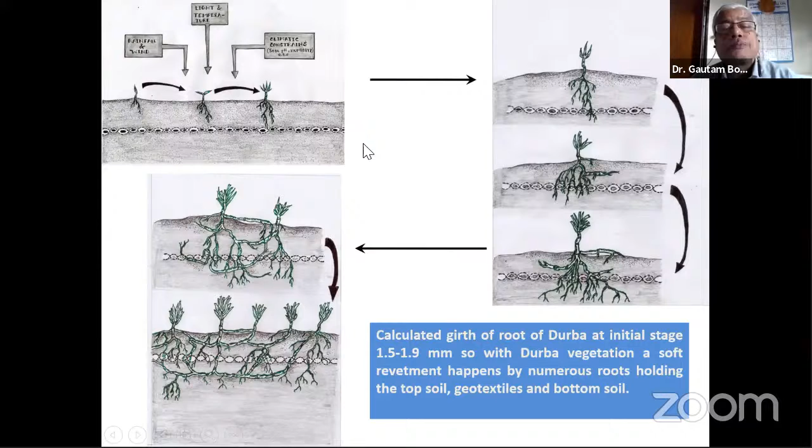Then the roots get distributed like that—you can see it. So the top layer and bottom layer of soil are being reinforced by the synthetic structure.

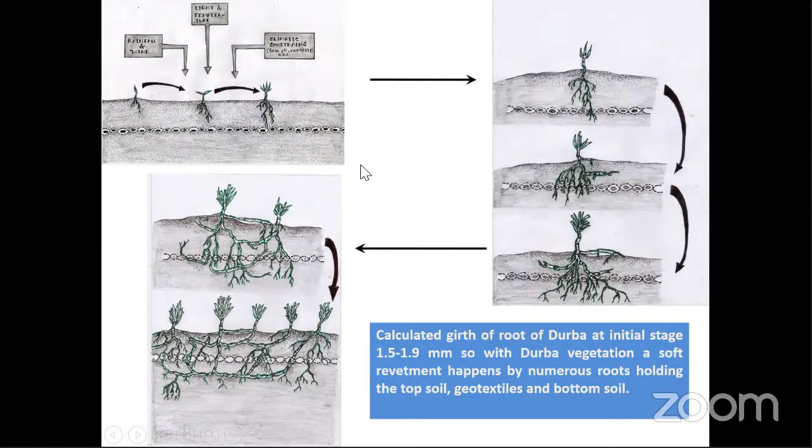I can show you our concept of how it has been reinforced. At the lab stage, you can see the jute has degraded and roots have penetrated the synthetic network. The rhizome in the upper part and stolons in the bottom part are interlinked naturally, making a very good three-dimensional, dense structure with the soil.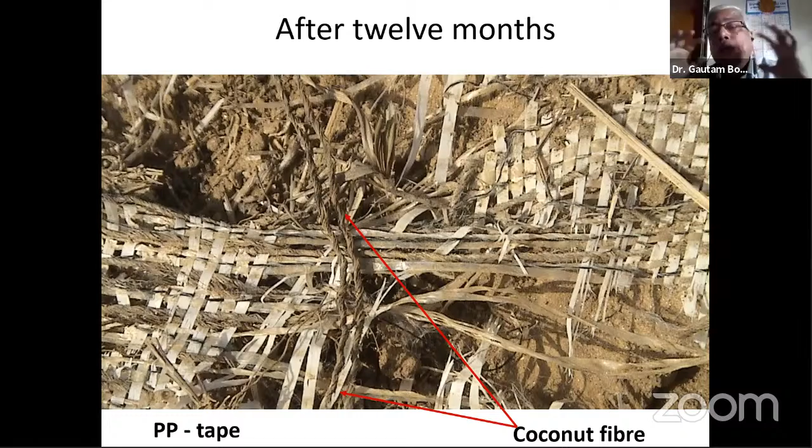But jute alone cannot protect everything. Your synthetic network should be there as reinforcement, just as we use iron structure in concrete—it should remain there as a network structure.

You cannot stop these things. Grass sods have been slipped and scattered vegetation. This is a major problem with 100% synthetic geotextiles, which has not been observed in this case.

In the second case study, which is more interesting, you can see the picture of the embankment before treatment. A fruitless effort was made by the local authority, and they took our help to protect this river bank, where water always embraces the bank. You can see the before treatment. The location is at the Rampurhat area.

Slant length was 14.8 meter and slant angle 30 degree to 45 degree. It is not equal, with embankment on the top is 2.6 meter. Another problem was that during high tide, the water is seeping through the embankment.

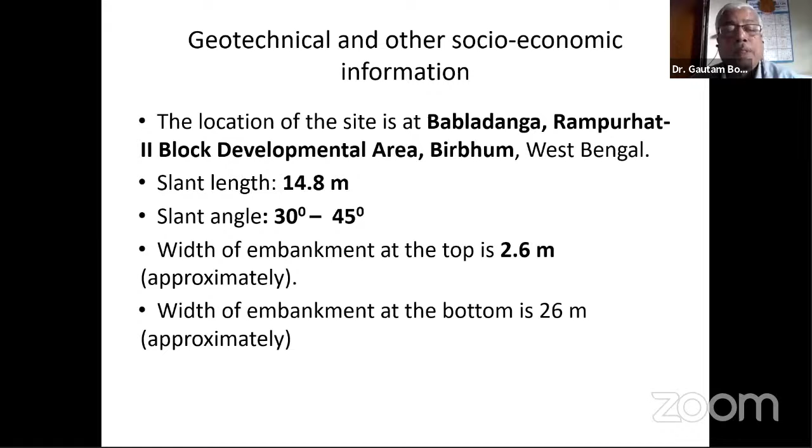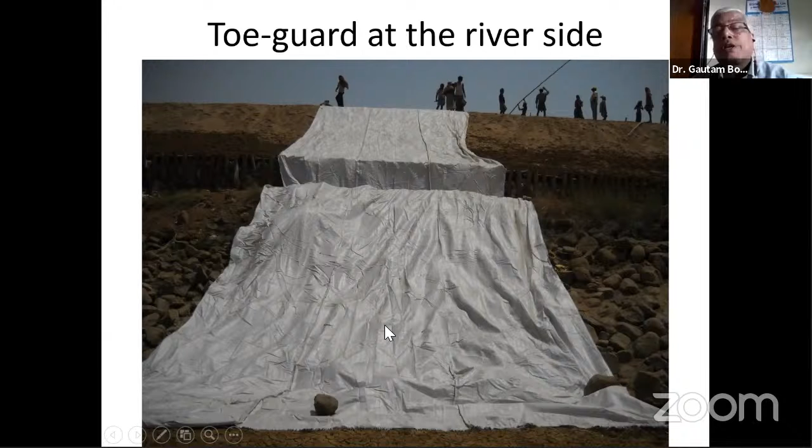And this was the structure. I can show you the original picture better. The polyjute strap cloth has been laid like this. Here two trenches have been cut, dug out, and cloth has been taken from inside to guard the toe of the river. You can see the picture of the whole cloth laid.

And upon that, the coconut rope net has been laid. Why has a coconut rope net been laid? Because this river is susceptible to 12 to 13 flash floods every year. So whatever silt gets deposited should not be washed out during successive flash floods. That is why to arrest the silt, that was laid.

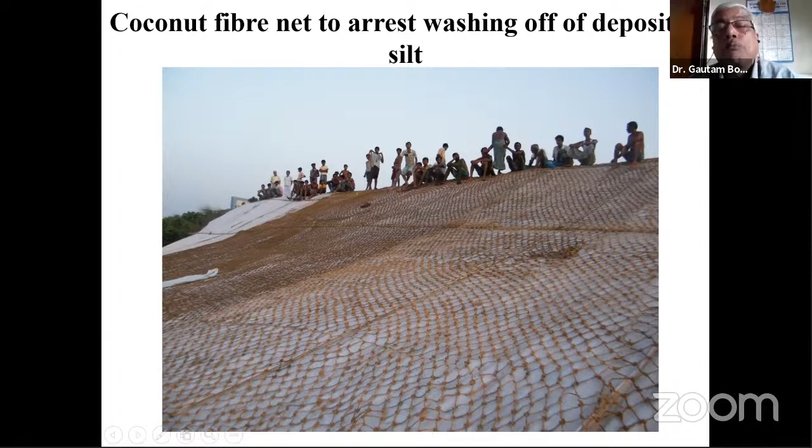And it was not a very costly matter. One unique feature used is that a seamless cloth sand bag has been laid. Seamless, it is a 40-meter long bag. There is no stitch, neither on the sides nor on the bottom or top. Seamless fabric has got 2 to 3 times the strength of seamed cloth. So with the same raw material, we got a stronger sand bag, geotextile tube.

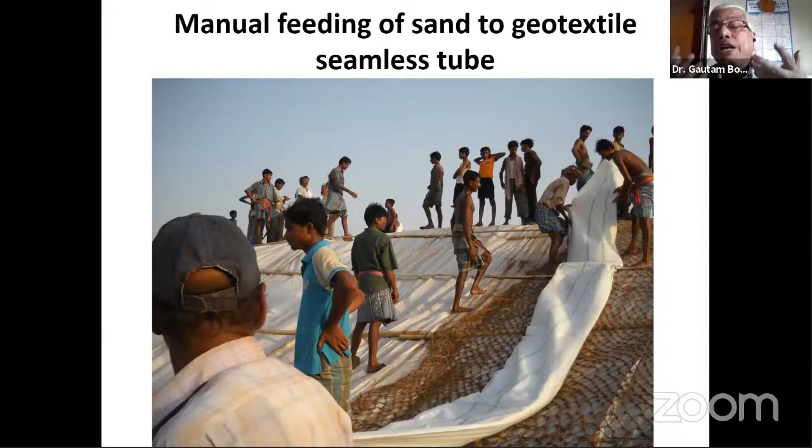With the circular cloth, you can see this circular cloth as a tube, length of tube is 40 meter, and mass of sand of the elliptical geotextile tube. It is moist sand, 137.34 kg per meter. Minor diameter is 12 centimeters and major diameter is only 70 centimeters, having 137.34 kg per meter. This is another novelty in this work.

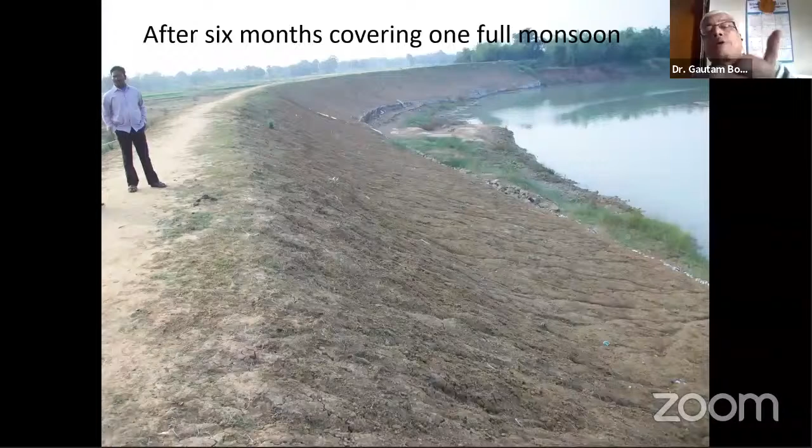The soil was covered, the geotextile was covered, and after a full 6 months covering one full monsoon, we can see. After 3 full monsoons, no deformation was observed. Vegetation started to grow. Thickness of the filter cake formed was 3 centimeters at the middle of the slant. Filter cake means the layer of soil behind the geotextile, which was cut carefully and measured. Soil retained within this net was 196 grams, thickness 1.5 centimeter.

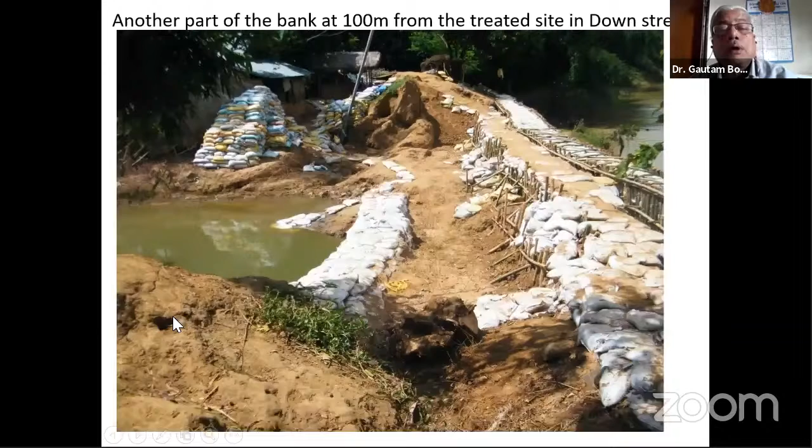After a year, it encountered 3 flash floods, and nothing happened. Every year they used to face flash floods 12 to 13 times, and every time it was usually washed out, but it was not washed out after 1 year. After 3 years, full vegetative cover has been established, fully covered.

After degradation of the jute, the bioengineering results have been given. After degradation of the jute, openness of the synthetic backbone increased by 137%, so very good breathability for the soil, flora and fauna. Gap of the thread interstices increased from 0.27 millimeter to 1.34 millimeter. And the girth of the root of the grass we measured is 1.5 to 0.9 millimeter, using a Japanese vernier.

Vegetation density is 77,500 units of grass per meter square, and growth of earthworms was also visible. In case of 100% synthetic, it is not visible. Withdrawal force of a single grass from the soil, tested by Instron tensile tester, is 8.5 Newton. So total withdrawal force is tremendous, 659 kilonewton per meter square. Huge strength, simply achieved by bioengineering.

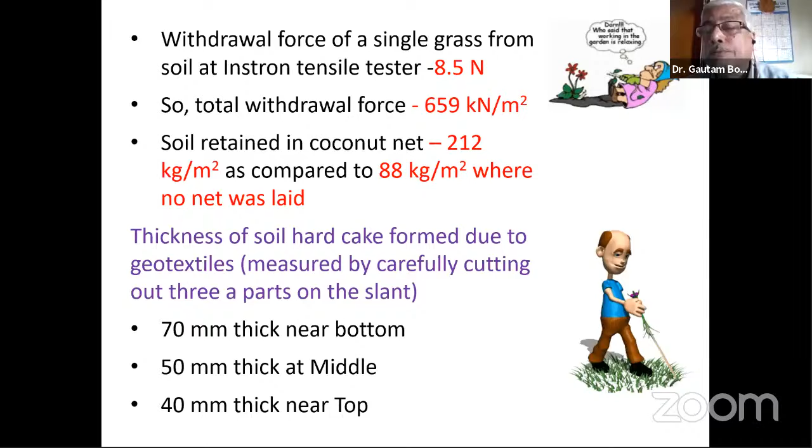Soil retained at the coconut net is 212 kg per meter square, compared to 88 kg per meter square where no net was laid. The thickness of the soil hard cake formed due to the geotextiles, measured by carefully cutting out 3 parts of the slant, is 70 millimeter near the bottom, 50 millimeter at the middle, and 40 millimeter near the top.

In conclusion, grass turfing along with jute, coconut fiber, and synthetic blended geotextile reinforcement has proven its excellence in protection of the rain-fed riverbank in absolutely sandy soil, maintaining the soil flora and fauna. The full package of practices, from selection of raw material to batch mix to application of the end product, is available. Thank you, sir.